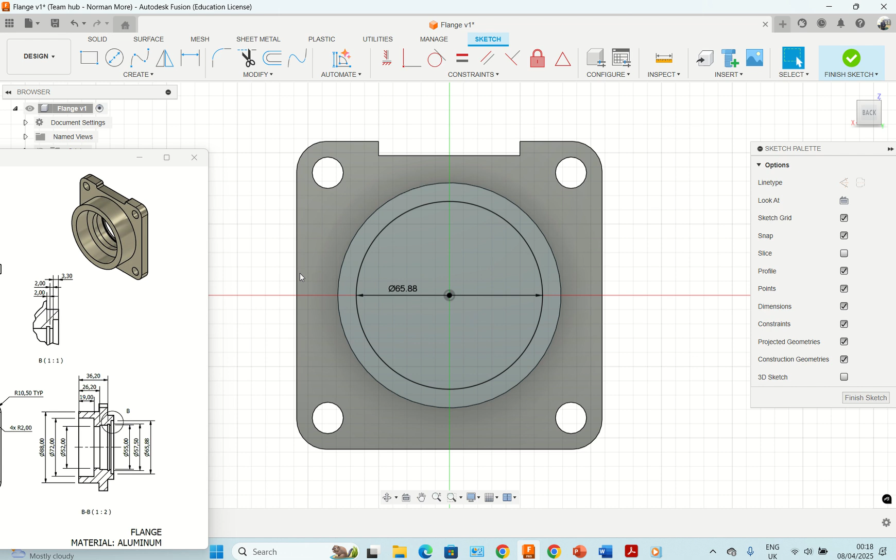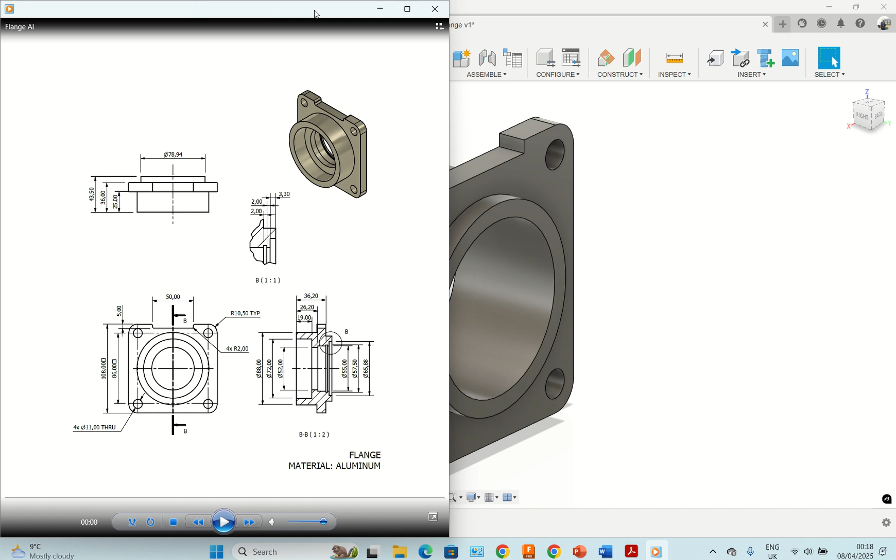And then I'm going to do an extrusion for that, which is negative 3.3. Okay. Oh, like that. So let's edit this. Yeah, type 3.3. That takes us up to that hole there.

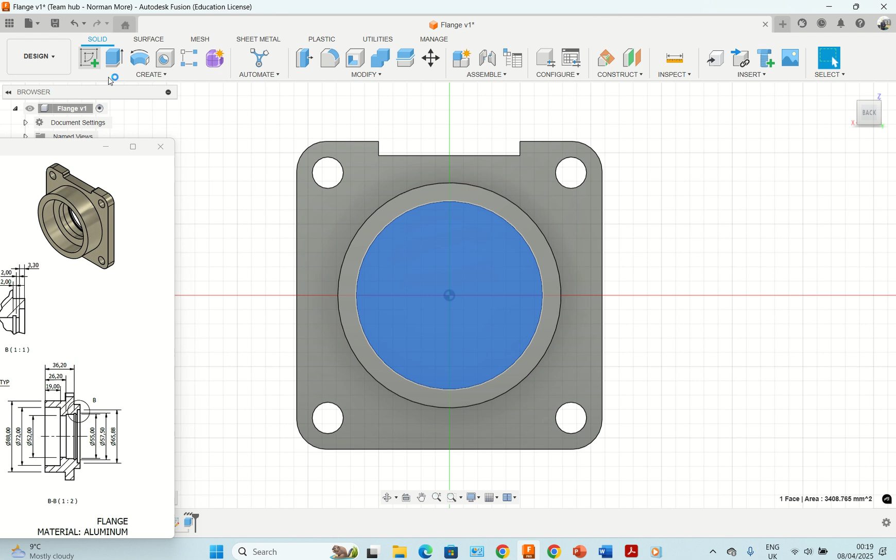Then I'm going to do now this third one, but I will take through, I have to add back something which I'm going to remove. So the third one will be sketch, and then I draw a circle of 57.5. And then I'm going to do an extrusion of these 2 and 2.

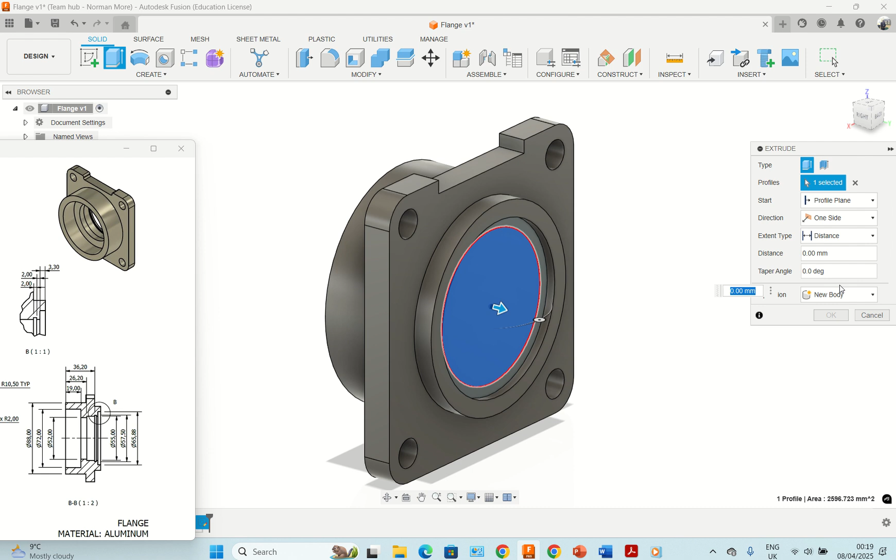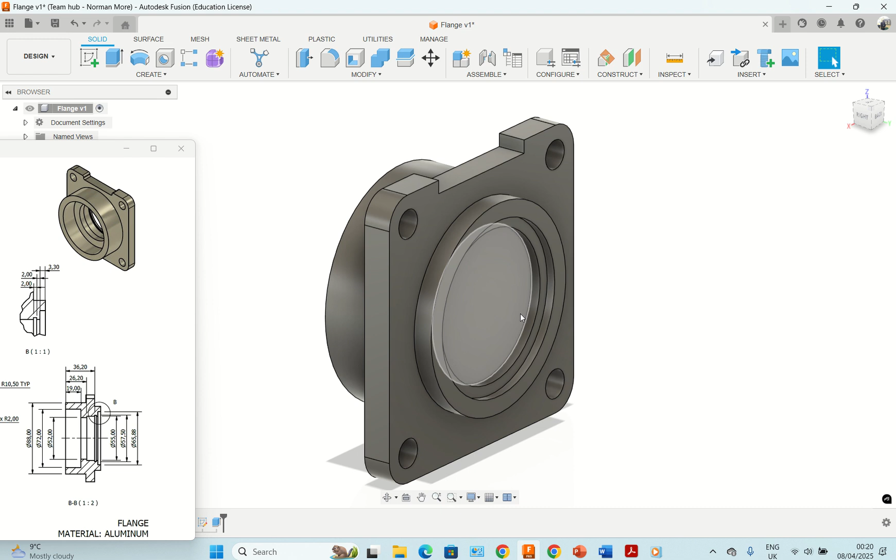So that one is going to be 4 mils, minus 4 mils going inside. But now we have gone through a smaller radius there, which is 55. So we need to add that one back. So I'm going to do a sketch on this surface, and I will just draw a circle up to that point, and then another circle at the inner radius,

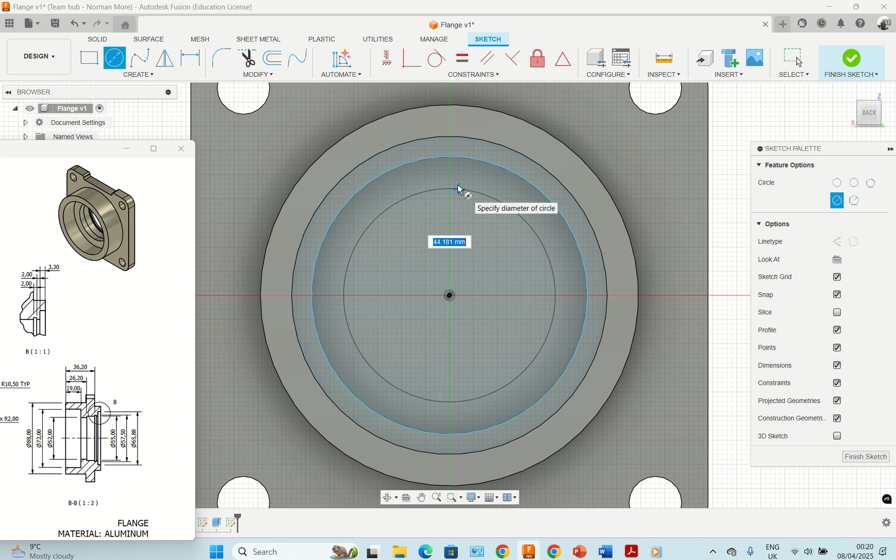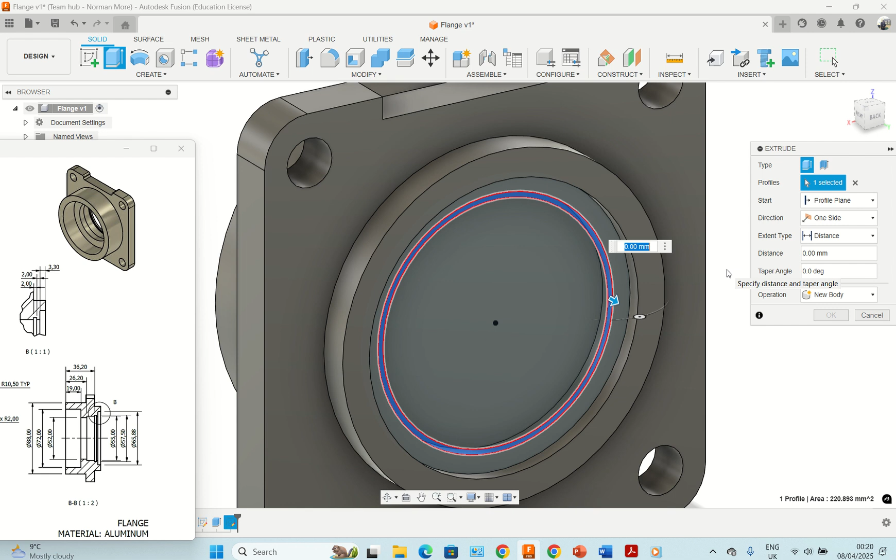which is 55. So if I do now an extrusion, all I need is that area there. I extrude it by -2. That will take us back inside and leave a gap in there. So from here then,

we need to make another depth, which is, according to here, 26.2 minus 19, which is 7.2. So I'm going to draw another circle at the same diameter of 55.

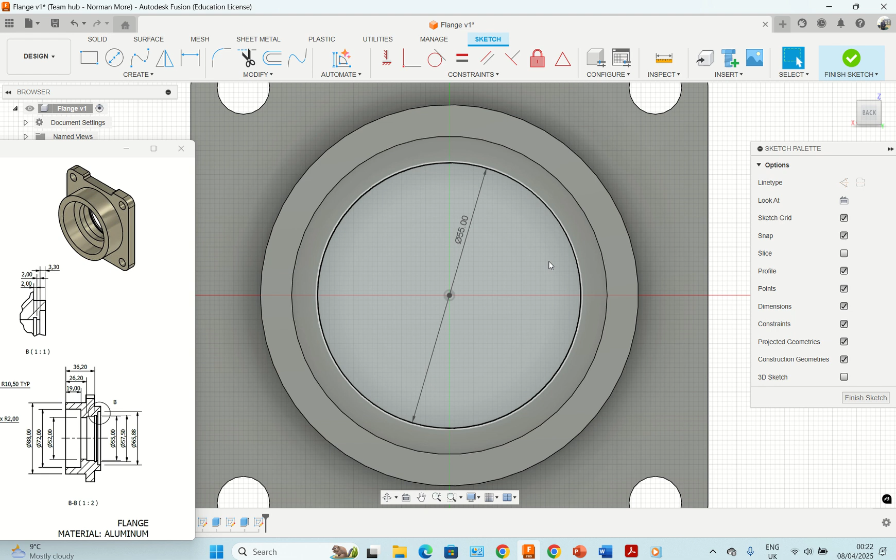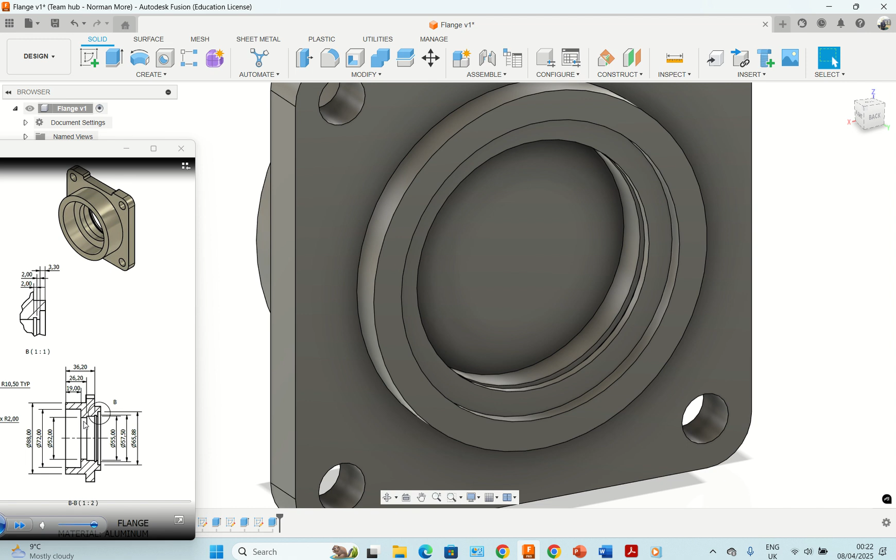But this time I'll do an extrusion of 7.2, -7.2. And that one goes in. Okay. So that takes us up to that point there. Now we cannot do any more of that side, so we need to turn around. So I click here,

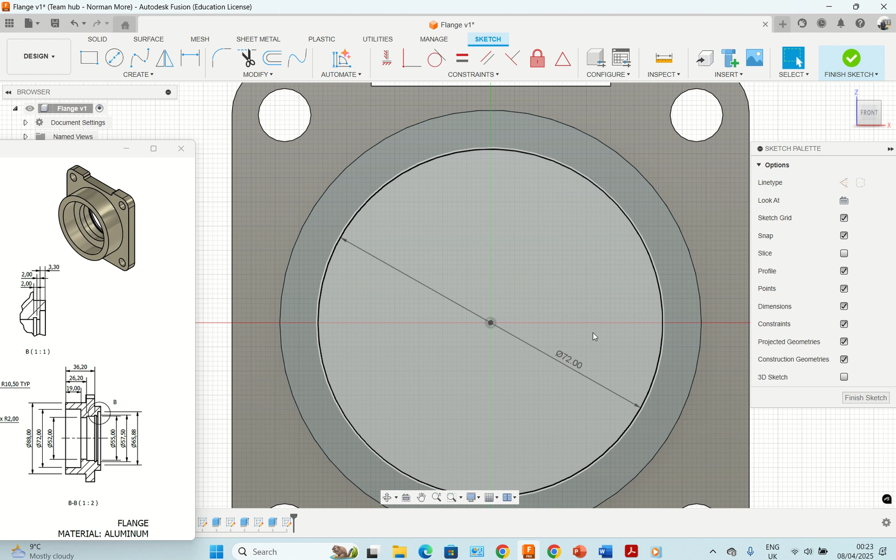sketch, and then I draw a circle now of the missing dimension, which is 72, and that one goes in by 19, extrude, minus 19, and then I click here again. There's another circle of 52, and this one goes in by 7.2.

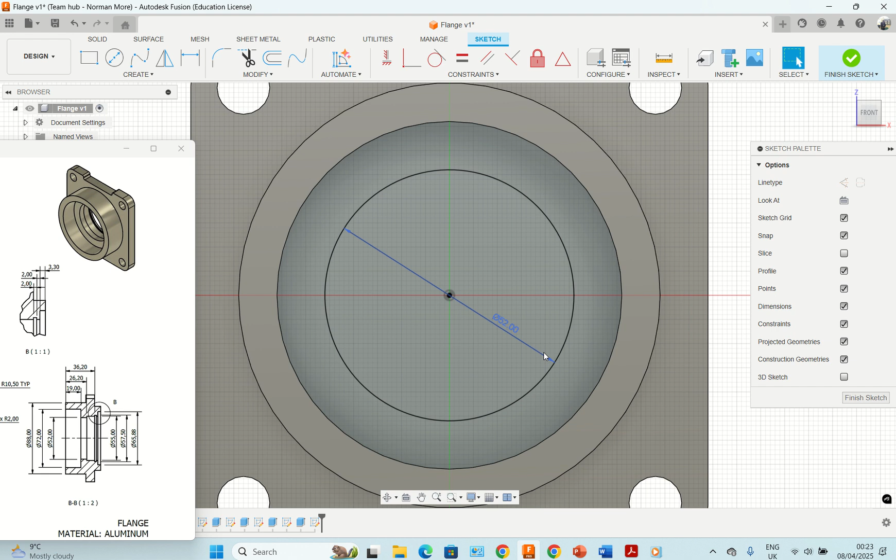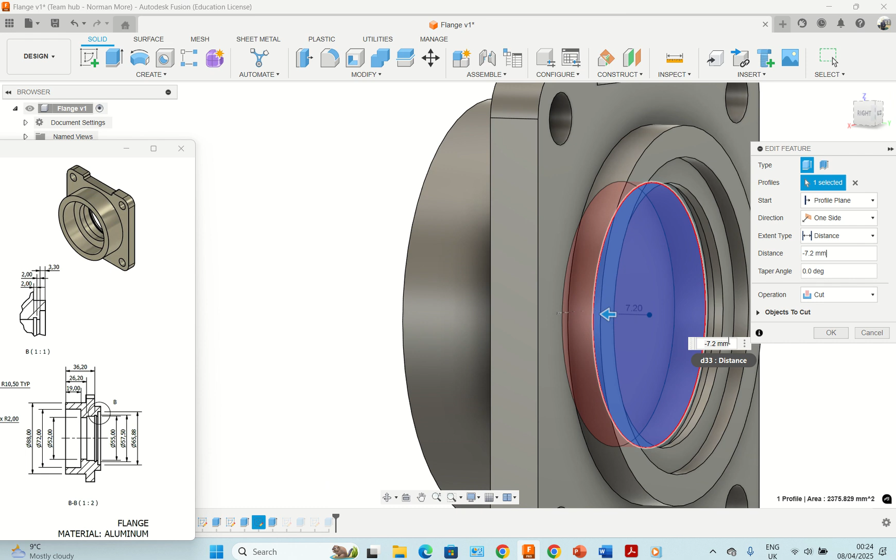There's a mistake in the previous one which I'm going to correct. So this is minus 7.2. We should be okay there. But the previous one, which I put 7.2, actually should have been 10. The last one, that one, is 10. Which should be that one. So we edit feature and put minus 10. And now it's gone through.

All our features are there. So that should be all. It covers everything. Okay, and it covers all the steps that we require.